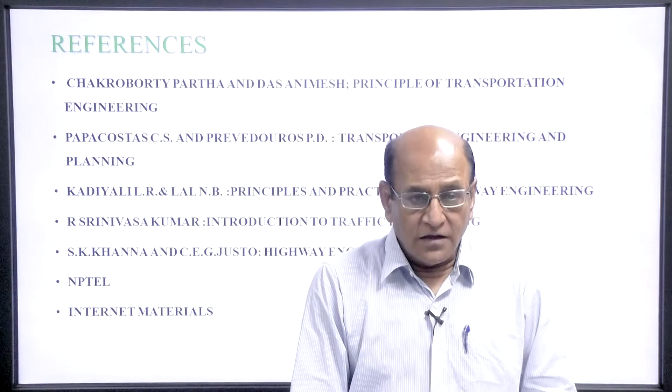References I have taken: Chakroborty Partha and Das Animesh, Principles of Transportation Engineering.

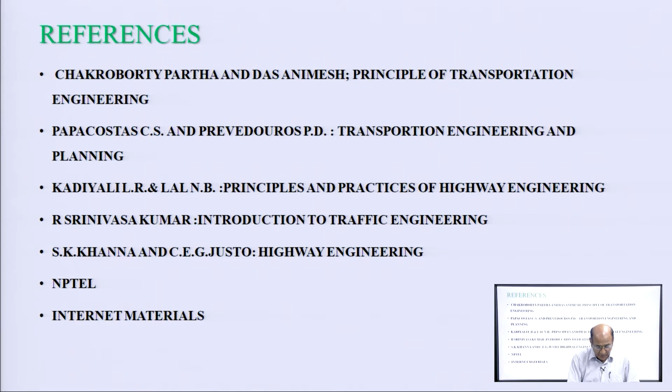Second, Papacostas CS and Prevedouros PD, Transportation Engineering and Planning.

Kadiyali LR and Lal NB, Principles and Practices of Highway Engineering.

R. Srinivasa Kumar, Introduction to Traffic Engineering.

Some material has been taken from NPTEL and some material has been taken from the internet.

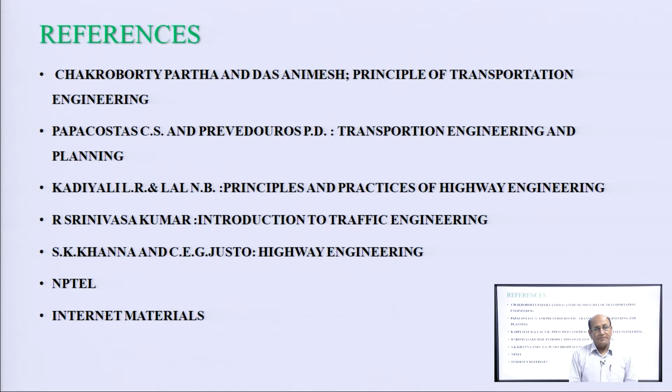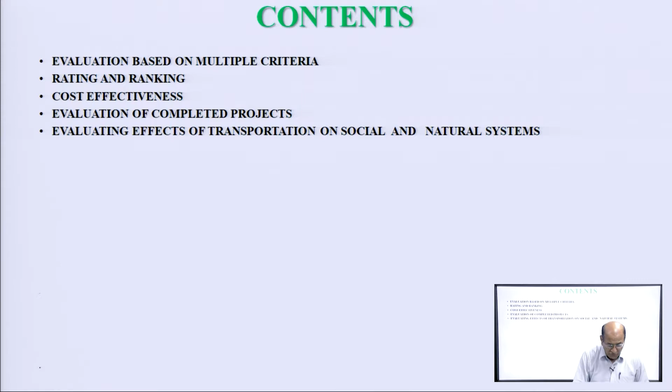The contents we will cover today: evaluation based on multiple criteria, and second, rating and ranking.

Next is cost effectiveness, next is evaluation of completed projects, and next, evaluating the effect of transportation on social and natural systems.

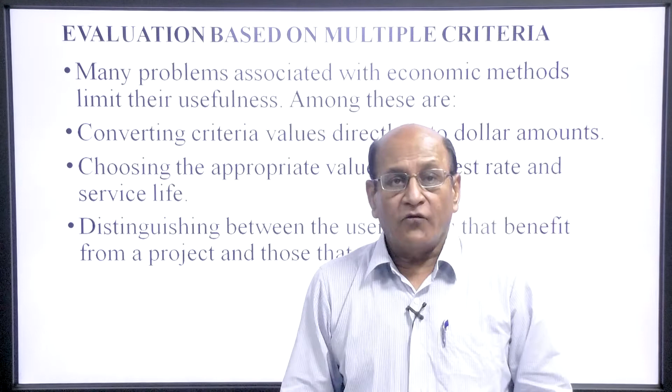So we will take these up one by one. First is evaluation based on multiple criteria.

Many problems associated with the economic method limit its usefulness. Among these is converting the criteria value directly into dollar amount or rupees amount.

Second, choosing the appropriate value of interest rate and service life.

The next is distinguishing between the user groups that benefit from a project and those that may lose.

Evaluation is the process by which we can determine which project or which alternative is better than others.

Finally, we can choose one of them, but there are many criteria for selection of the alternatives.

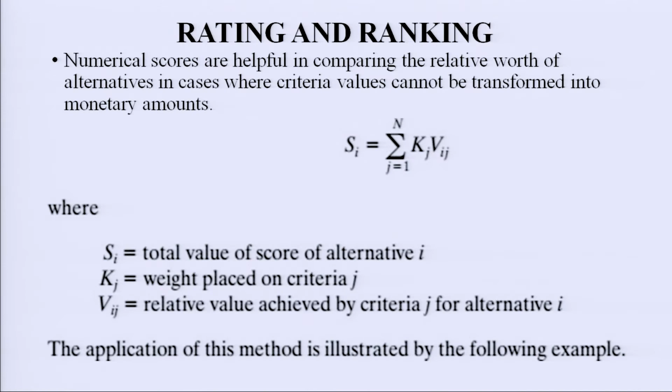S_I is the total value of the score of alternative I.

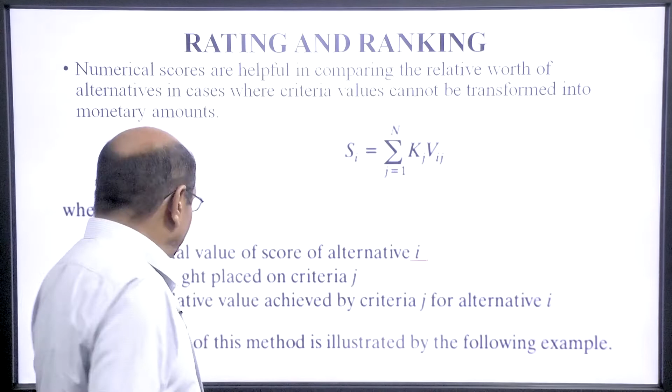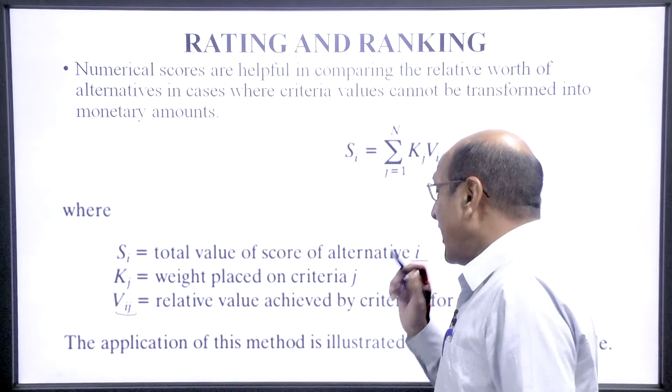K_j is the weight placed on criteria j, and V_Ij is the relative value achieved by criteria j for alternative I.

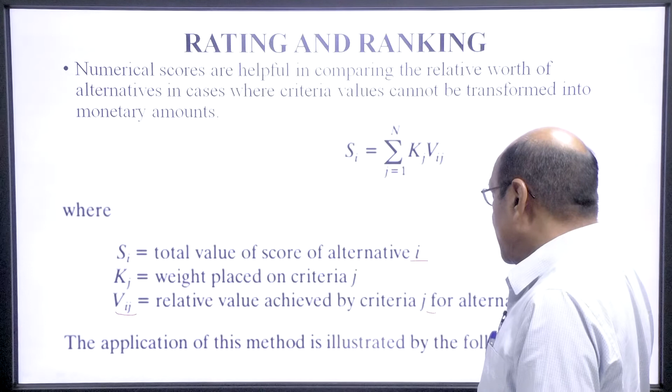The application of this method is illustrated by the following example. This example has been taken from the internet.

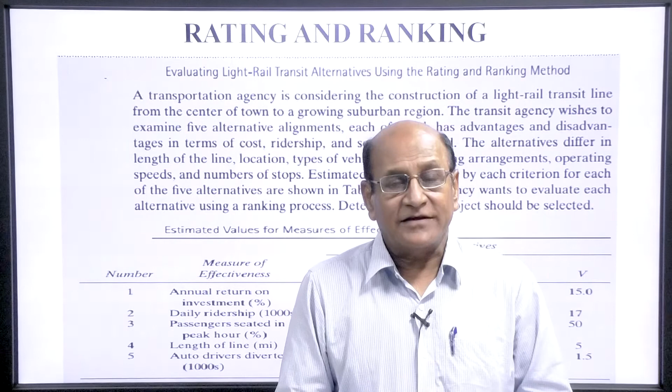And the example is from the USA. For understanding purposes, it has been taken from the internet.

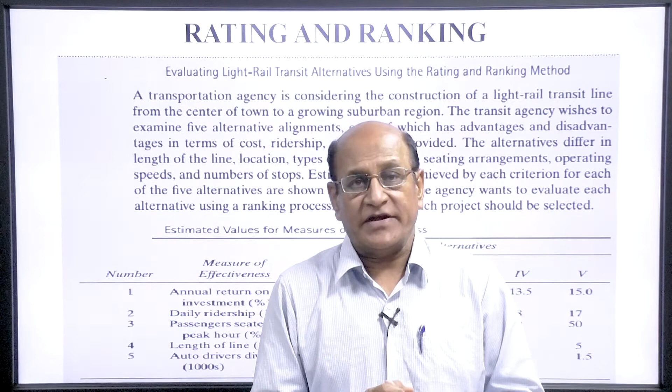So we have taken evaluating light rail transit alternatives using the rating and ranking method.

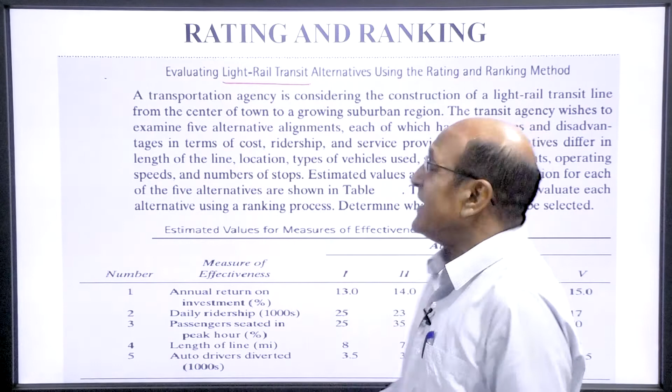A transportation agency is considering the construction of a light rail transit line from the center of the town to a growing suburban area or region.

The transit agency wishes to examine 5 alternative alignments, each of which has advantages and disadvantages.

In terms of cost, ridership, and service provided.

The alternatives differ in the length of line, location, and type of vehicles used.

Seating arrangement, operating speed, number of stoppages - the estimated value achieved by each criteria for each of the 5 alternatives are shown in the table.

This is the table. The agency wants to evaluate each alternative using a ranking process. Determine which project should be selected.

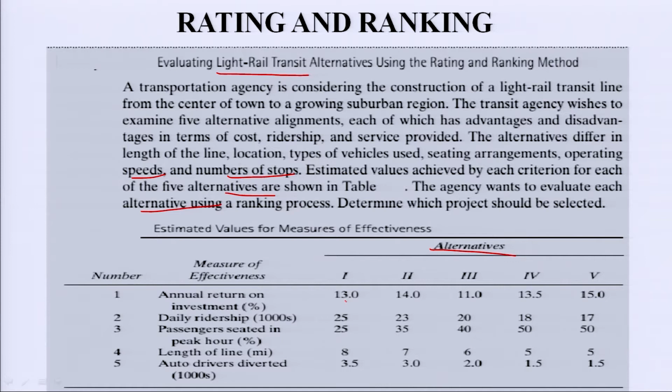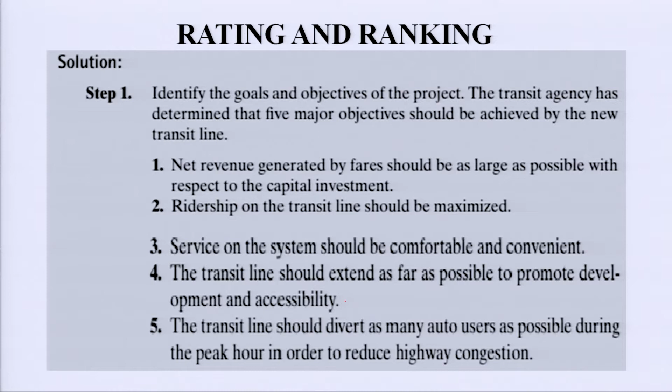Now come to the solution. What would be the solution? The first step is to identify the goal and objective of the project. This is the top priority work.

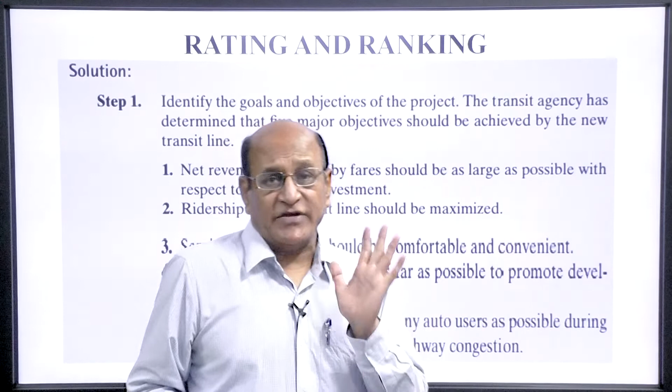The transit agency has determined that 5 major objectives should be achieved by the new transit line. What are the objectives? First, net revenue generated by fare should be as large as possible, and this is the objective of any transportation system. Whatever revenue is generated in an alternative, that should be maximum and larger. This is our main motive or objective of any transportation system.

Second, ridership on the transit line should be maximized. Ridership should be more. One example I am giving you is Lucknow Metro. Lucknow Metro is going in loss. Why? The ridership is not increasing as expected. So the total project is going in loss.

The next is service on the system should be comfortable and convenient. In cost terms it is not measurable, but it is one of the things considered while selecting an alternative, because comfort and convenience is one of the main issues for the transportation user.

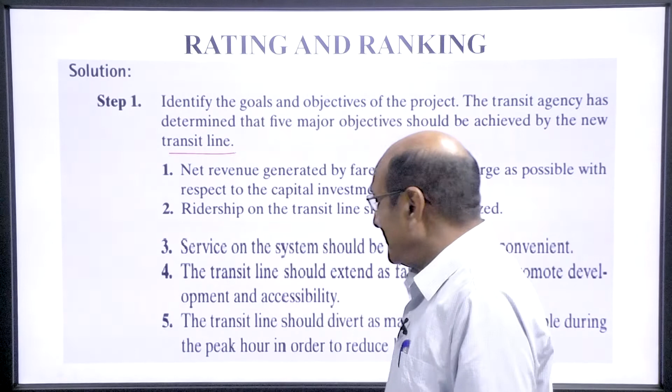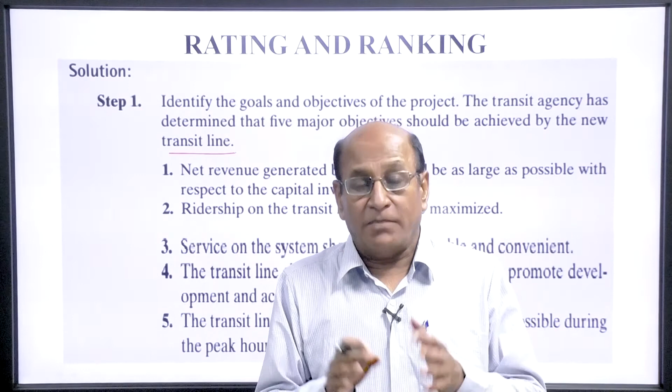The next is the transit line should be extended as far as possible to promote development and accessibility. The transit line should be such that it contributes to development of the city, the urban area, but there should also be accessibility for that transit line.

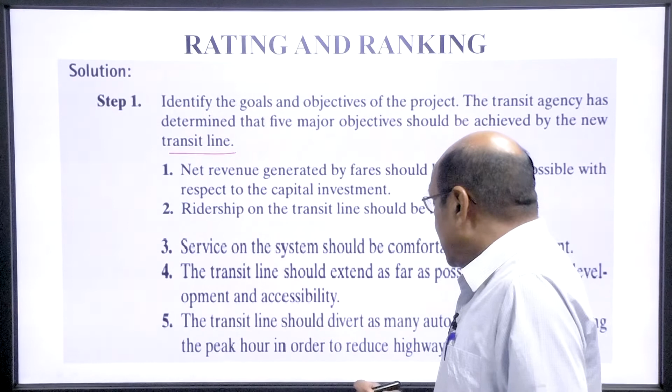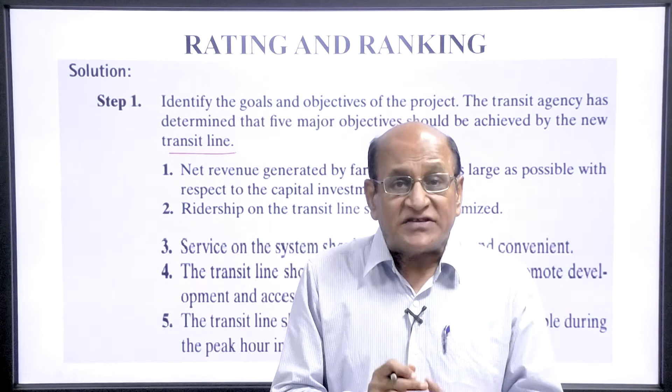The fifth objective is the transit line should divert as many auto users as possible during peak hours in order to reduce highway congestion. This means the road users should be diverted during peak hour to avoid or reduce congestion on the highway. So these are the 5 objectives on which the alternatives are evaluated.

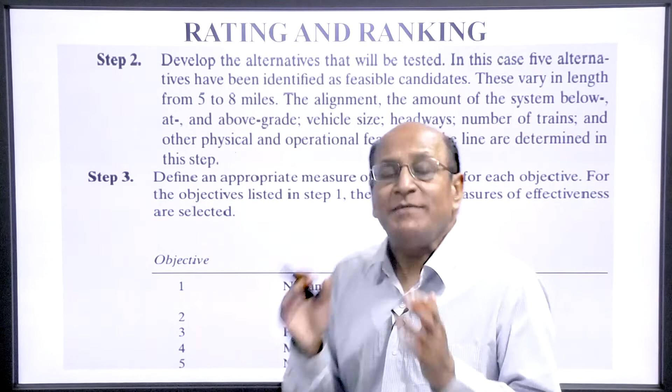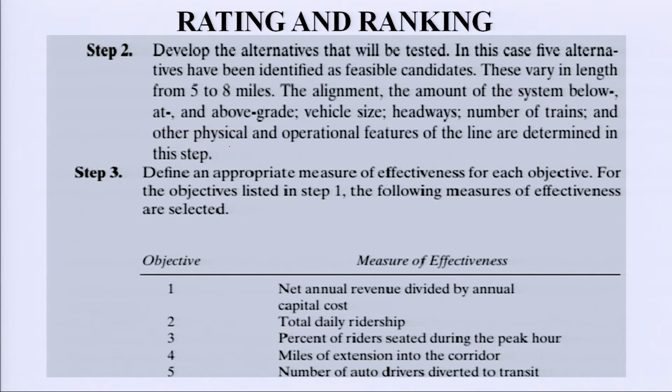Now come to the second step: develop the alternatives that will be tested. In this case, 5 alternatives have been identified as feasible candidates. These vary in length from 5 to 8 miles, in alignment, the amount of the system below, at, and above grade, vehicle size, headway, number of trains, and other physical and operational features of the line. These physical things are considered, fixed, or determined in this step.

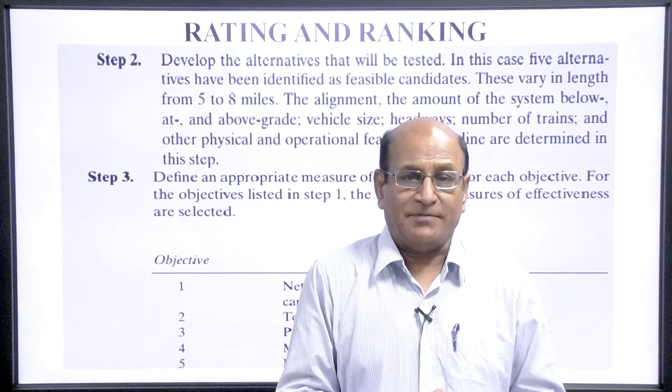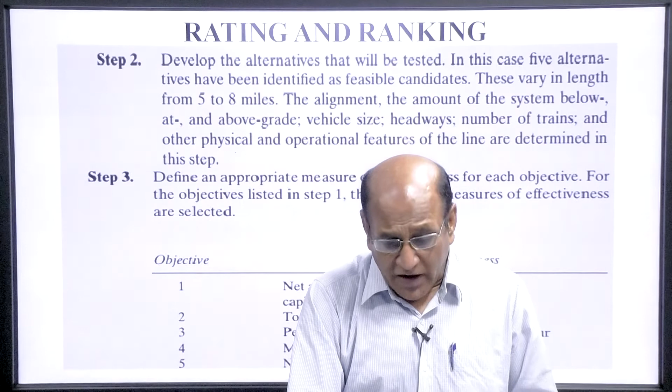Now come to the third step: define the appropriate measure of effectiveness for each objective. We have 5 objectives, and each objective should have an appropriate measure of effectiveness. For the objectives listed in step 1, the following measures of effectiveness are selected.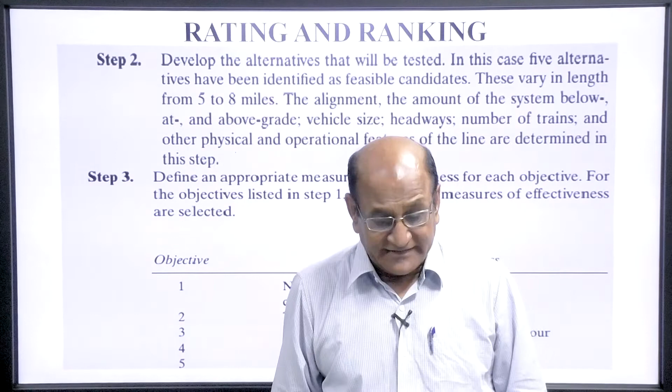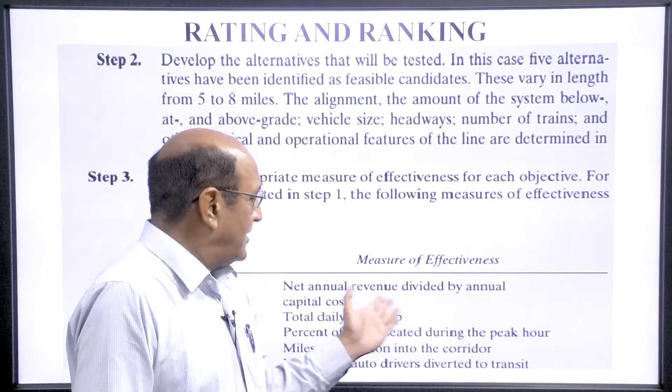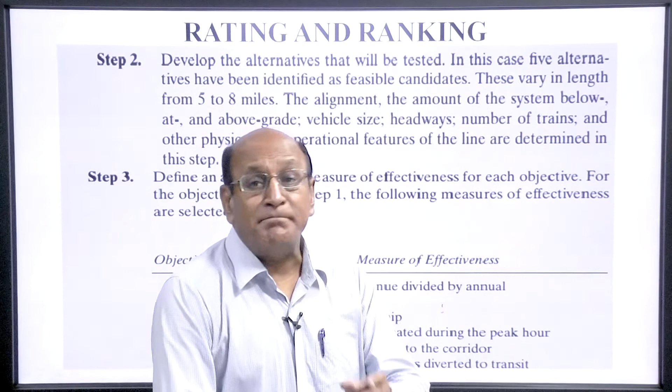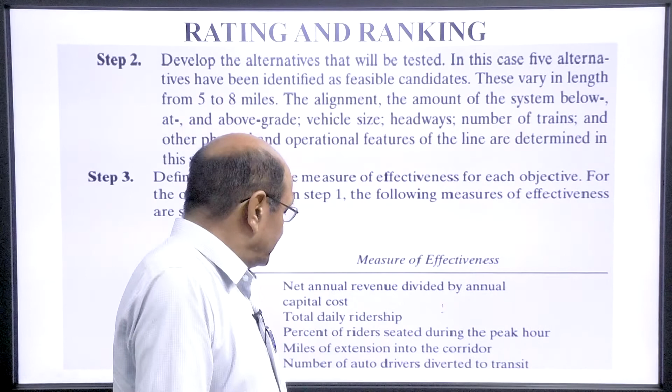We can see in the table these are objectives 1, 2, 3, 4, 5 and the measure of effectiveness: first, net annual revenue divided by annual capital cost; second, total daily ridership; third, percent of riders seated during the peak hour; fourth, miles of extension into the corridor; and last, number of auto drivers diverted to transit during the congestion period or peak hour.

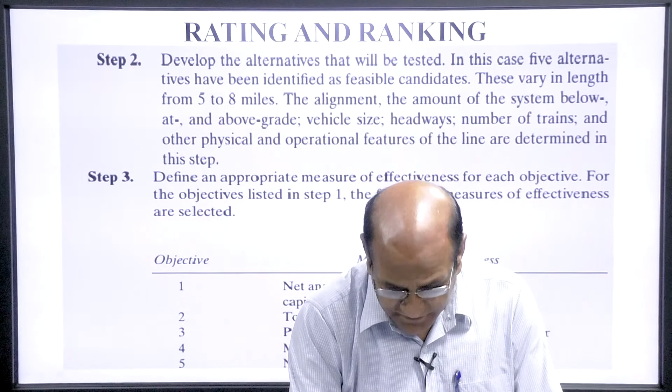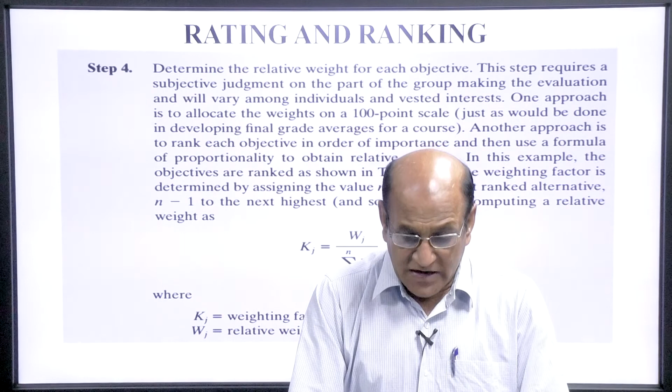The next step is step 4: determine the relative weight for each objective. This step requires a subjective judgment on the part of the group making the evaluation, and will vary among individuals and vested interests. One approach is to allocate the weight on a 100-point scale. This allocation process is just as would be done in developing the final grade average of a course.

Another approach is to rank each objective in order of importance and then use a formula of proportionality to obtain the relative weight. In this example, the objectives are ranked as shown in the table. The weighting factor is determined by assigning the value n to the highest ranked alternative, n minus 1 to the next highest, and so forth, and computing a relative weight.

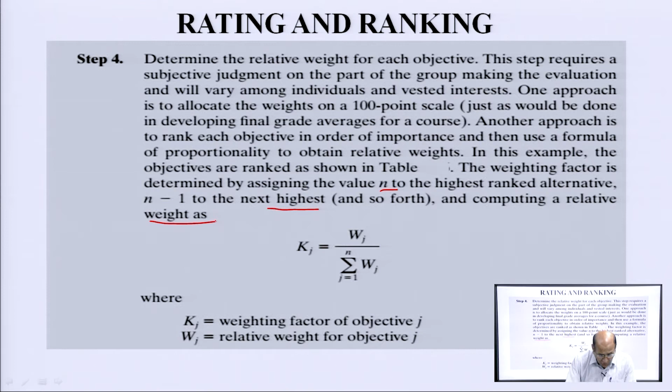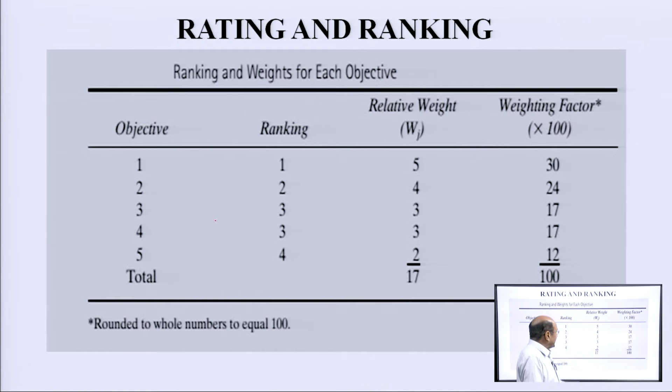By this formula, we can say K j equals W j divided by the sum over j equals 1 to n of W j, where K j is the weighting factor of objective j, and W j is the relative weight of objective j. So we can see here the objective ranking, relative weight, and weighting factors: ranking 1 has relative weight 5 and weighting factor 30. So these are the relative factors.

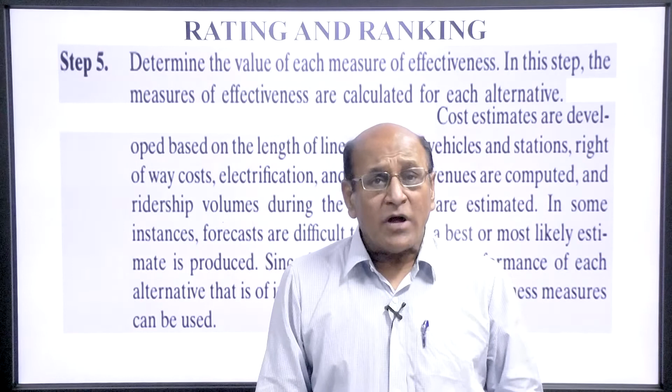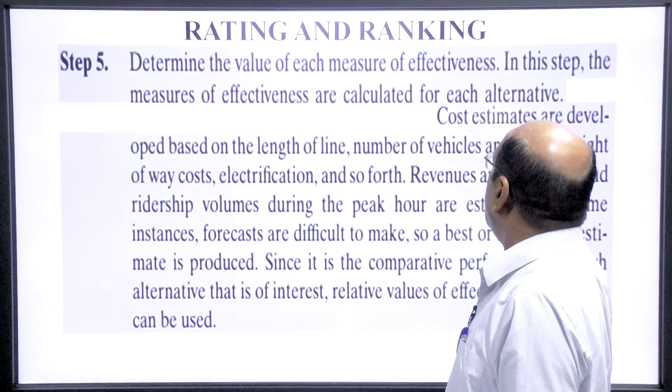Now come to step 5: determine the value of each measure of effectiveness. In this step, the measures of effectiveness are calculated for each alternative, and cost estimates are developed based on the length of the line, number of vehicles and stations, right of way cost, electrification and so forth.

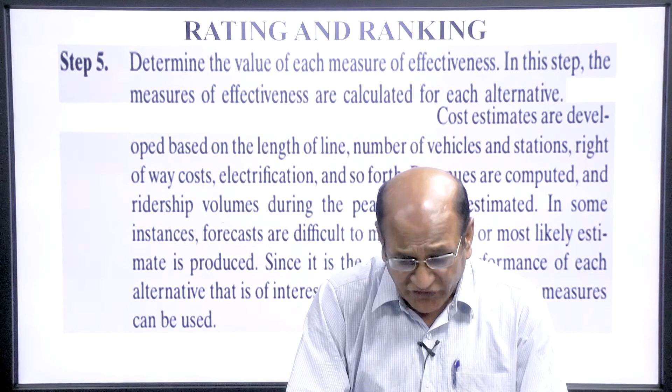Revenue is computed and the ridership volume during the peak hour is estimated. In some instances, forecasts are difficult to make, so a best or most likely estimate is produced, since it is a comparative performance of each alternative that is of interest. Relative value of effectiveness measures can be used.

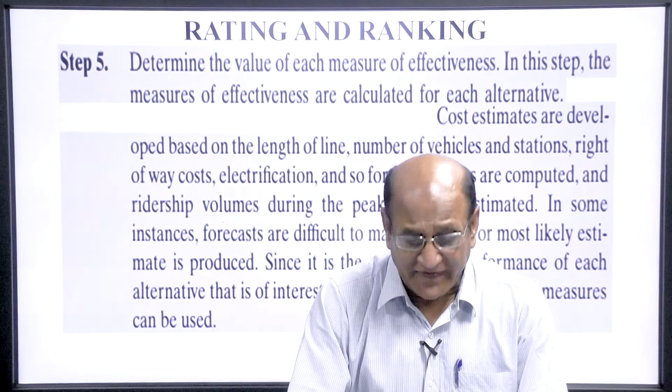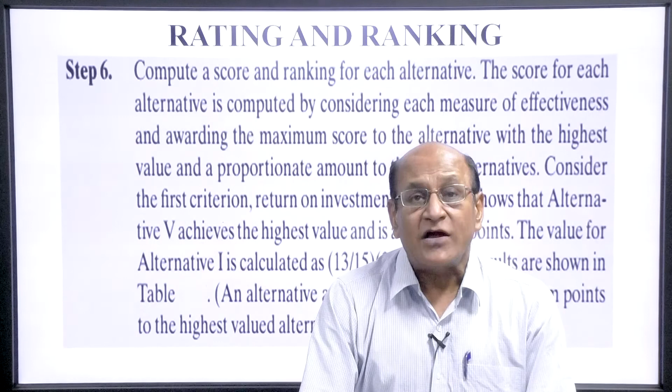Then come to step 6: compute a score and ranking of each alternative. This score for each alternative is computed by considering each measure of effectiveness and awarding the maximum score to the alternative with the highest value, and a proportionate amount to the other alternatives.

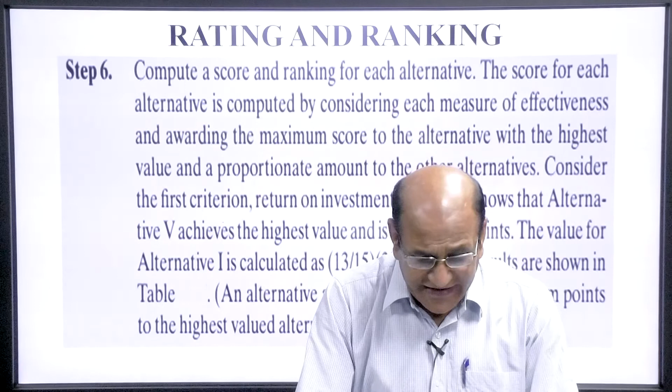Consider the first criteria, return on investment. The table shows alternative fifth achieves the highest value and is awarded 30 points. The value for alternative first is calculated as 13 by 15 into 30, that is 26. The results are shown in the table.

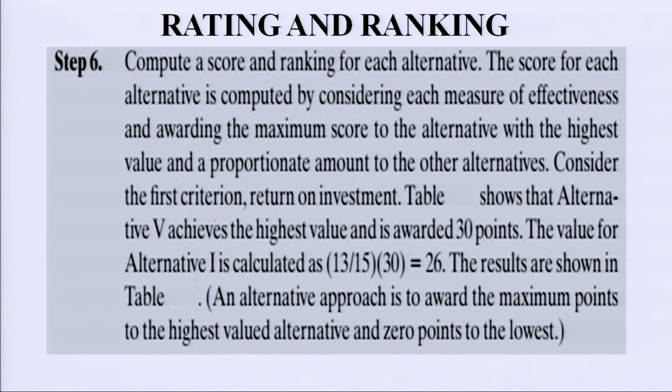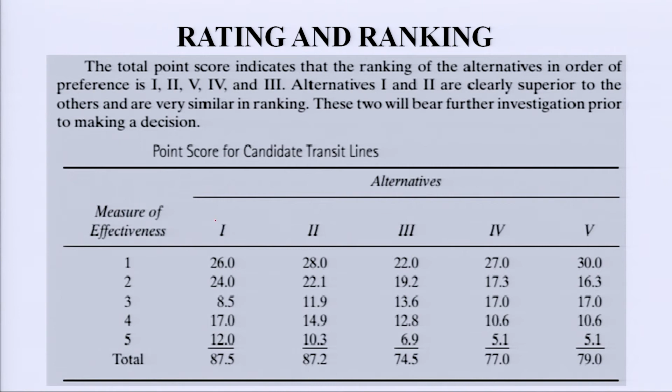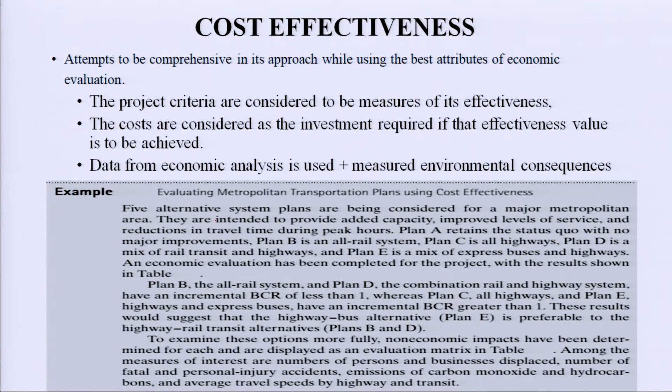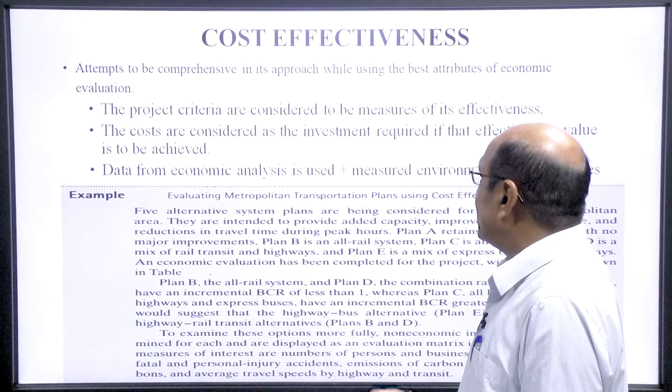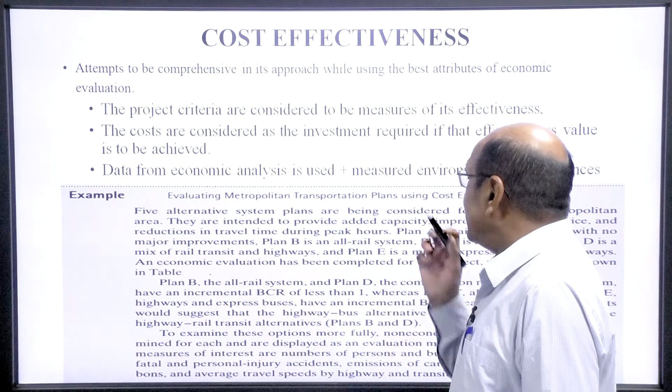The cost effectiveness approach attempts to be comprehensive while using the best attributes of economic analysis. The project criteria are considered to be the measures of effectiveness. The costs are considered as the investment required if the effectiveness value is to be achieved. The data from the economic analysis is used plus measured environmental consequences.

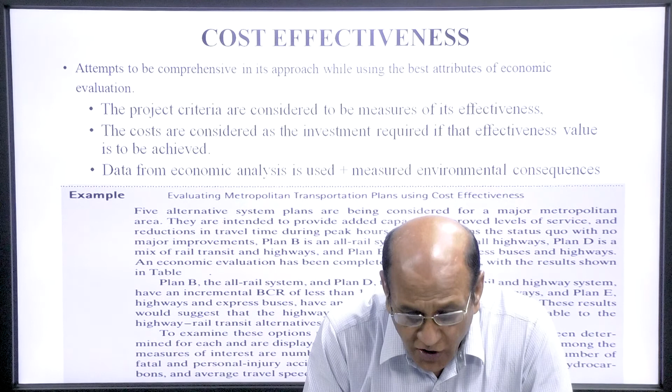So this is an example of evaluating metropolitan transportation plans during design using cost effectiveness. The solution is given here. The examination of the table yields several observations in terms of number of transit passengers carried. Plan E ranks highest, followed by plan B.

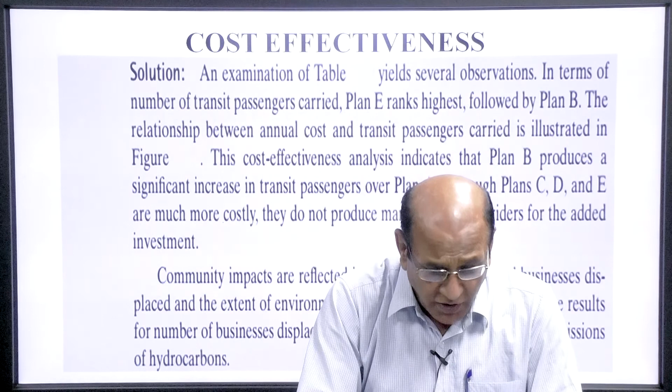The relationship between the annual cost and the transit passengers carried is illustrated in the figure. The cost effectiveness analysis indicates that plan B produces a significant increase in transit passengers over plan A, although plans C, D and E are much more costly. They do not produce many more transit riders for the added investment.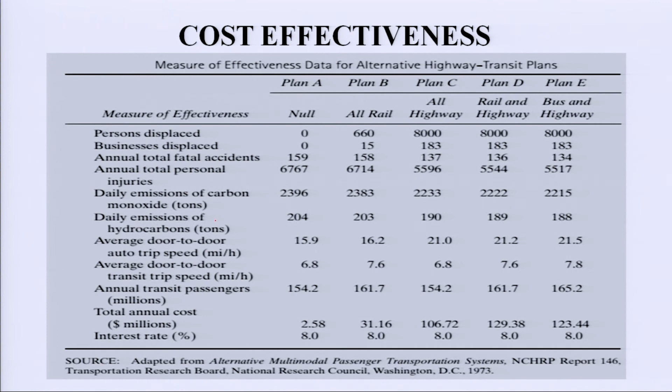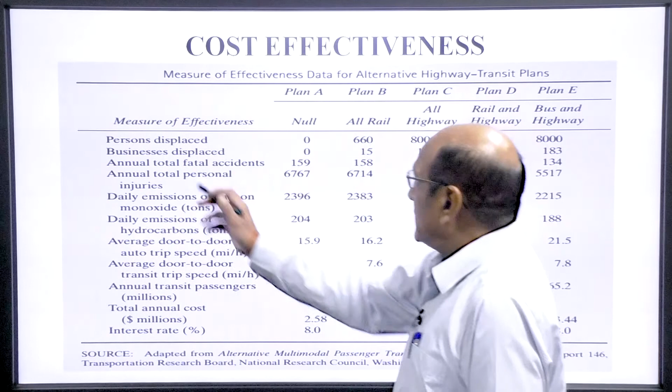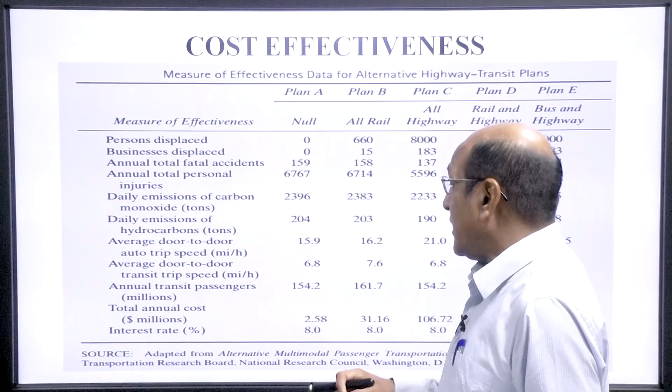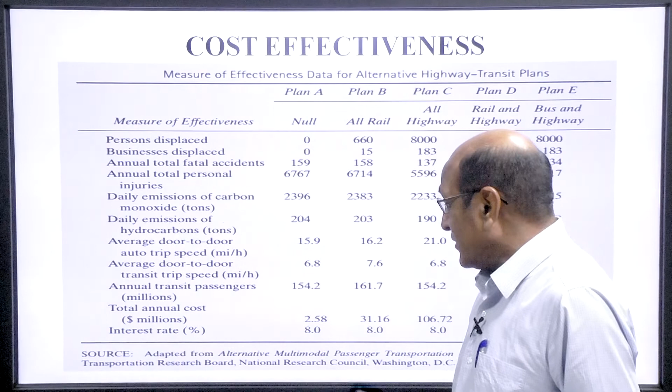So we can see here the cost effectiveness table, where the businesses displaced, annual total fatal accidents, annual total personal injuries, daily emission of carbon monoxide, daily emission of hydrocarbons, average door to door auto trip speed, average door to door transit trip speed, annual transit passengers in millions, total annual cost, and interest rate given in the table.

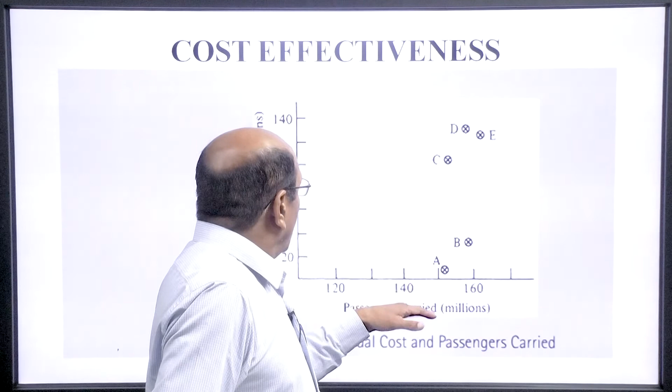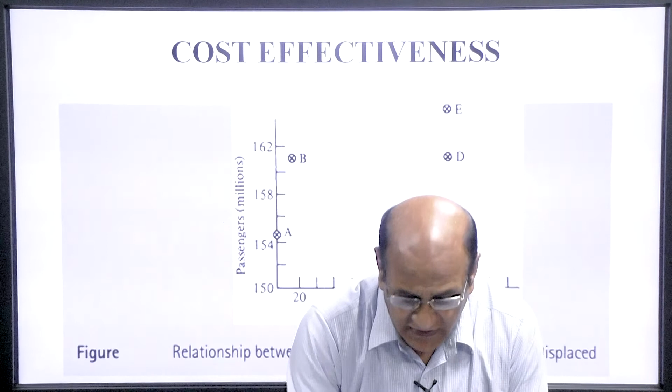This is the graph between the annual cost and passengers carried in millions, and we can see the cost increasing, just a few numbers increase and the cost increases this way. Then this is the passengers in millions and the businesses displaced shown here.

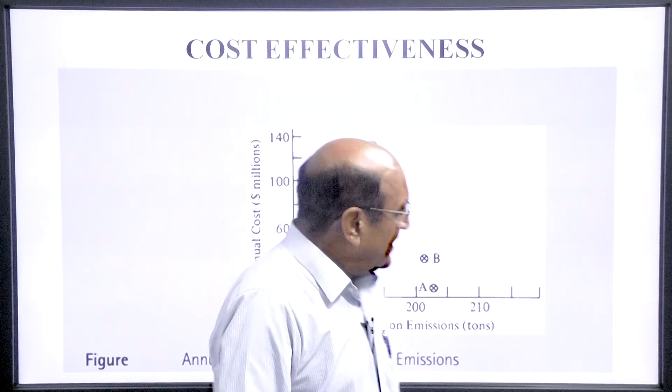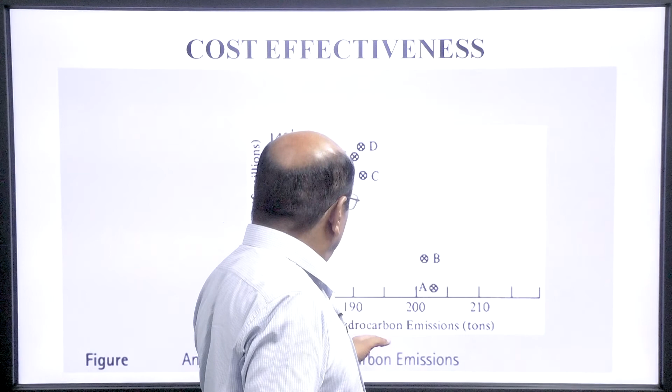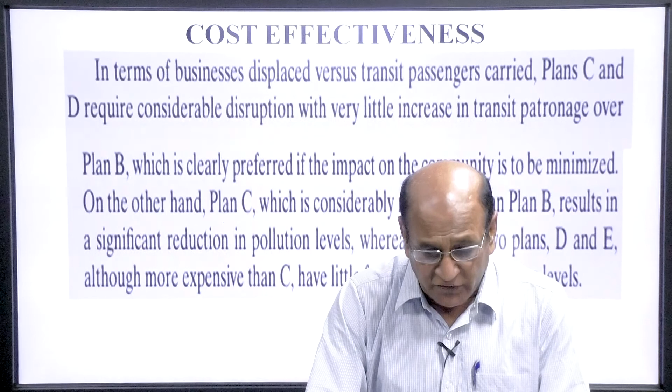The next is hydrocarbons emission with annual cost given here, and we can see the cost is much higher when the hydrocarbons emission is lower. So cost effectiveness, in terms of businesses displaced versus transit passengers carried, plan C and D require considerable disruption with very little increase in transit ridership over plan B.

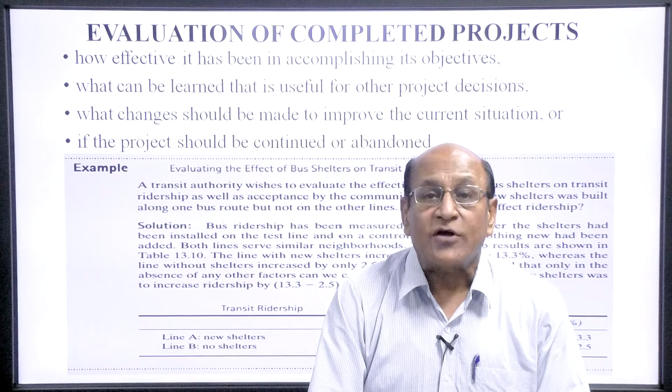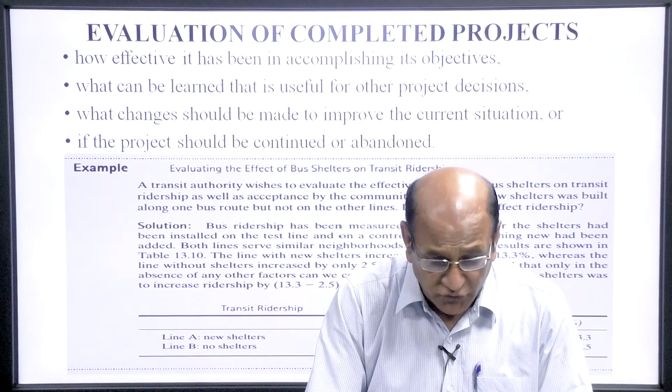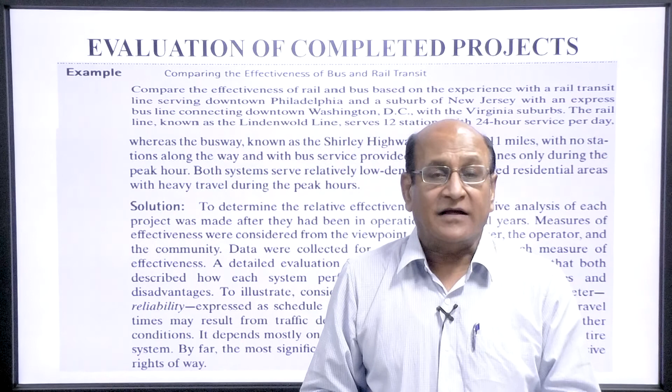So for evaluation, we can go for the evaluation of a completed project to compare the alternatives - how effectively it has accomplished its objectives, or what can be learned that is useful for other project decisions, and what changes should be made to improve the current situation if the project should be continued or abandoned. So an example is given here, and we can go for evaluation of the completed project for comparing the alternatives we are considering.

So these are the examples given here.